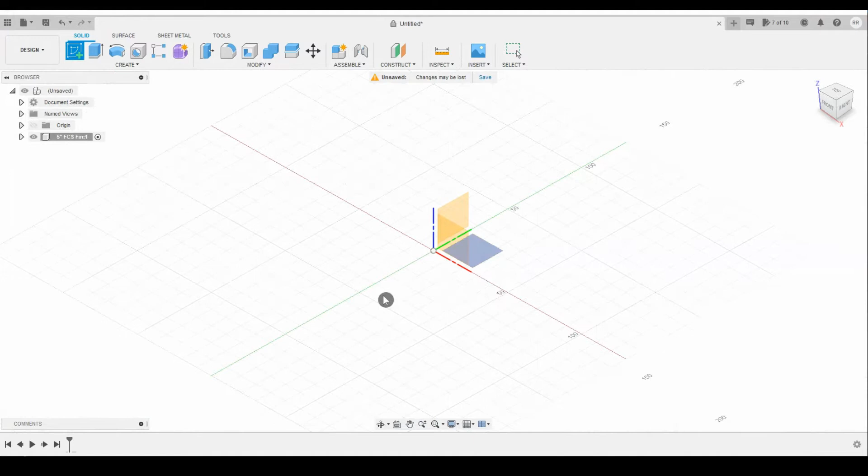Now we need to create a sketch. First thing you need to build everything from sketches in Fusion 360. So create a sketch up here, and we need to tell Fusion 360 where we want to place this sketch. You can see here we've got our top, front and right hand side. I want to create it from the right hand side of the fin. You can put it where you like, whatever makes more sense to you.

So we are now going to draw a sketch on this plane. I want a picture of my fin, so I'm going to insert a canvas and insert from my computer this image, which I found online, which you can probably find yourself with a quick Google search.

Now this canvas is asking where we want to put it. We want to put it on this face that we're looking straight at. It's a bit small at the moment, so we're going to grab this corner piece and drag it out. At the moment this canvas is at the wrong size, it's not the size we want it to be, but handily, it has some measurements on it.

So we're just going to click OK for now, but find our canvas. We're going to expand out our fin in the list over here on the left, and then expand out our canvases, and here is our canvas. We know that because when we hover over it, it turns blue. Right click on that, and we're going to calibrate our canvas.

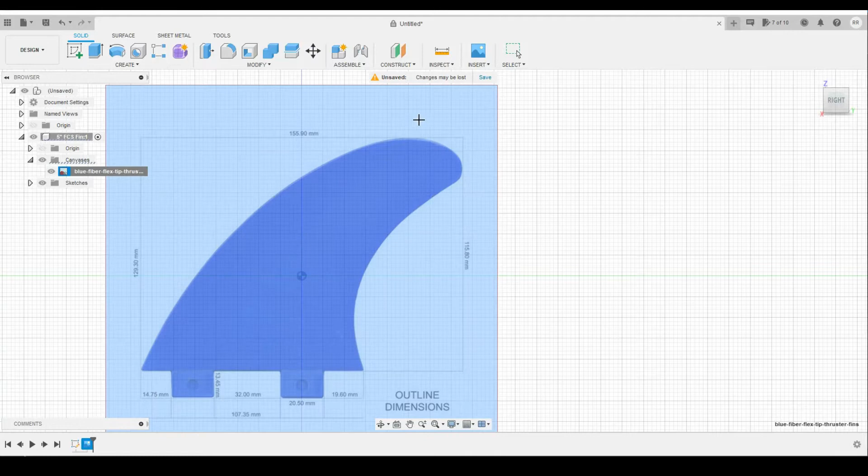We then get these little crosshairs, so we're going to calibrate against a known measurement. We know this measurement here is 115.8 millimeters. So we're going to click at either end of this measurement, click the other end here. Now at the moment it's saying it's 56 millimeters, so that's wrong. So we're just going to overtype it with our 115.8.

We hit enter, that's going to expand our drawing out to now match the right scale. It's in the wrong place though. I want this bottom corner down here to sit on the origin, which is where all the different planes meet in Fusion 360. It's basically our 0 point.

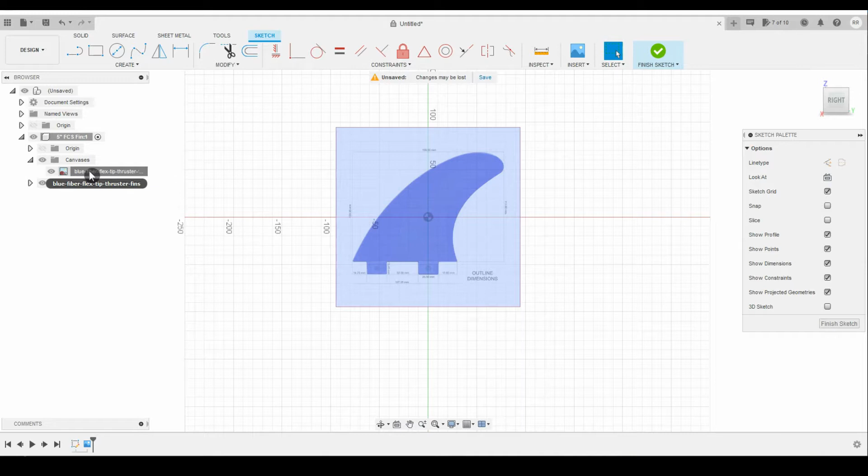So again, we're going to come up into our menu on the left and right click and edit the canvas. That brings us back to the screen that we had before. And now if we pick up this big square, we can just move our canvas anywhere we like.

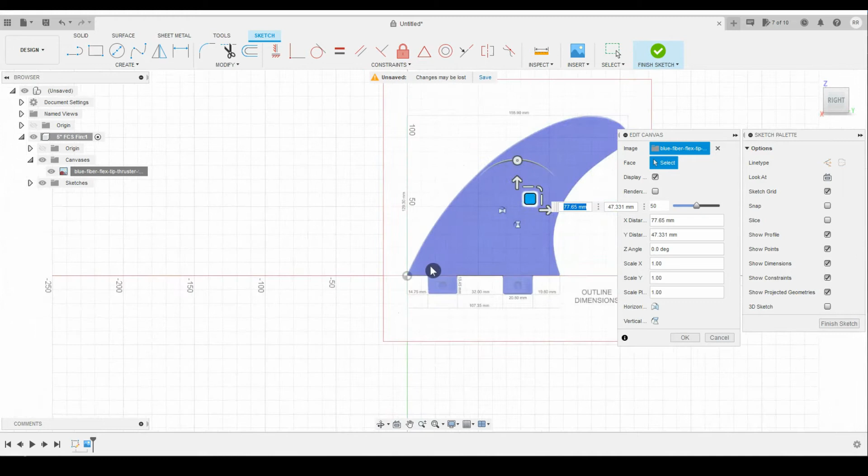Let's zoom in a little bit so we can see what we're doing. So we see on the left hand side we want the line to line up with the green line, and then we want the bottom of the fin to sit on the other axis. Okay, I'm happy with that - this point down here is sitting on the origin. Once we're happy with our positioning of our canvas, we can OK that.

Now what we're going to do is we're going to draw over it. So we're still in create sketch, and the first thing I'm going to do is draw this bottom line of the fin along here. I'm going to go up, I'm going to choose a line from the toolbar at the top.

I'm going to go from our origin, it auto snaps to that origin. Then zoom in a bit, and we're going to put it where that comes down there. Once we're happy with that line, we'll click on the green tick, and that line's in position. Now, because we started that line from the origin, Fusion 360 knows its location and knows we want it to start from that 0 point.

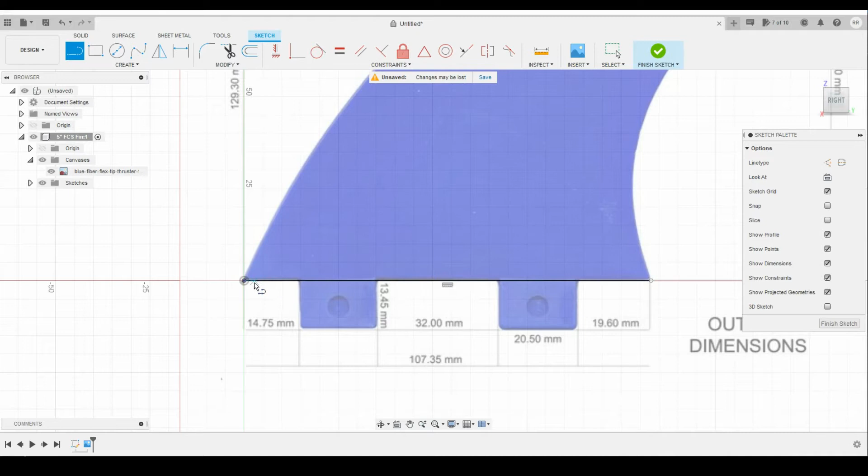If we did a line just randomly anywhere else, it would be blue, because it wouldn't know a dimension from a fixed point unless we told it. It would be blue, and you can run into problems later on with that - it can move all over the place. So it's always best to start a project from an origin if it makes sense to. It's not a hard and fast rule, but it just makes things easier.

The next thing I'm going to do is draw a box around this fin. Now, I'm not going to draw it as a normal line. What I'm going to do is come over to the line type here and choose a construction line. This is mainly for me, so I know that it's not actually part of the drawing - it's a line to help the construction, so it's like a reference line.

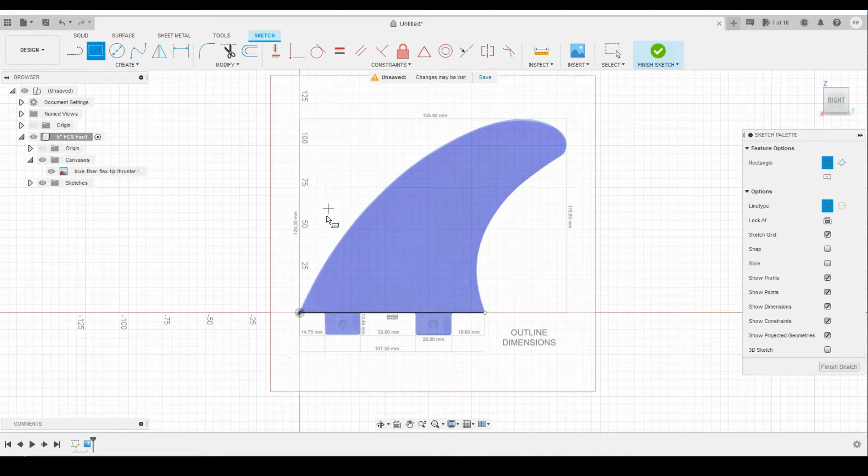I'm just going to zoom in a little bit. I'm going to start from the origin, and put that box around, so it's going to be roughly over here. Now you can see down at the bottom there, highlighted in blue, the measurement across from left to right, and it's currently showing 115.425. We want that to be 155.9 because that's how big that box is.

I'm basically just drawing over the box that's already there. If we then hit Tab, it locks in that dimension at the bottom, and it goes up to the dimension on the right hand side, on the left hand side. And we know from looking at the right hand side that we want that to be 115.8. So now we have a box that sits over the top of our fin to the outer dimensions of our fin.

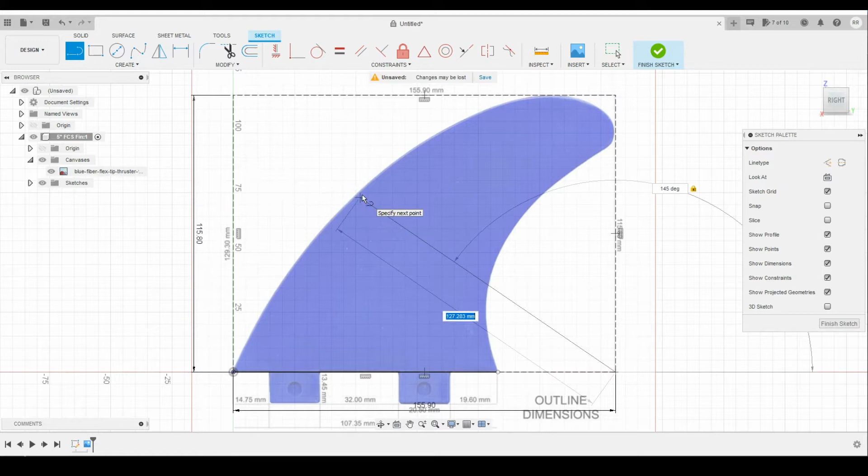And then what I'm going to do is draw a line, not as a construction line. I'm going to draw and put the line over here somewhere at the moment. And I'm not going to set the length - I'm going to tab off of the length and set the angle to 145 degrees. Now, the only way that will move, because I've locked in the angle, I can only change the length. And I'm going to put the length on this line over here. I'll show you why in a minute.

Right, so now we have a couple of things, but what we are missing is an outline of our fin. So I'm going to take the fit point spline tool, and make sure you start right on this corner where it's highlighted and snaps to the corner - don't start anywhere else. Once we click there, we can then start tracing around our shape. Now, you don't have to be too perfect with exactly where this is going, but one thing you do want to do is link up with the end of the line that you just created. For now, we're going to OK that.

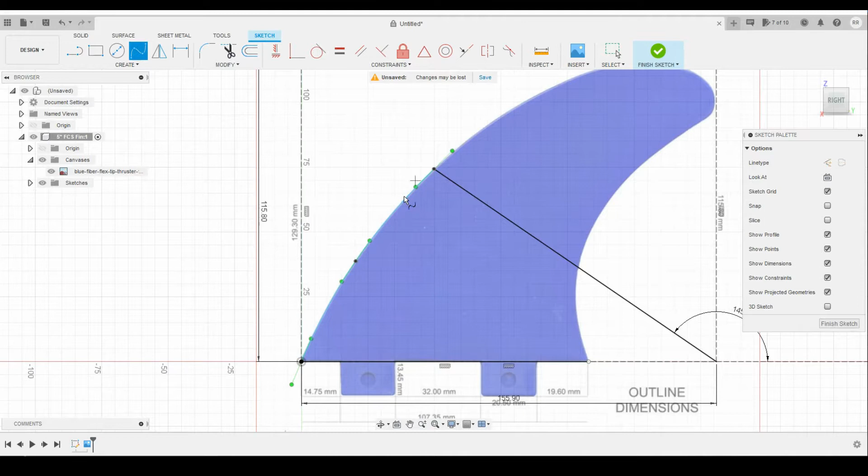So all we have is a line along this curve. Now, if you weren't happy with the position in any of these, you can grab these little T pieces at the end here - I can't remember what they're called - and you can actually tweak that line. I'm quite happy with it there. I might do some more in a minute.

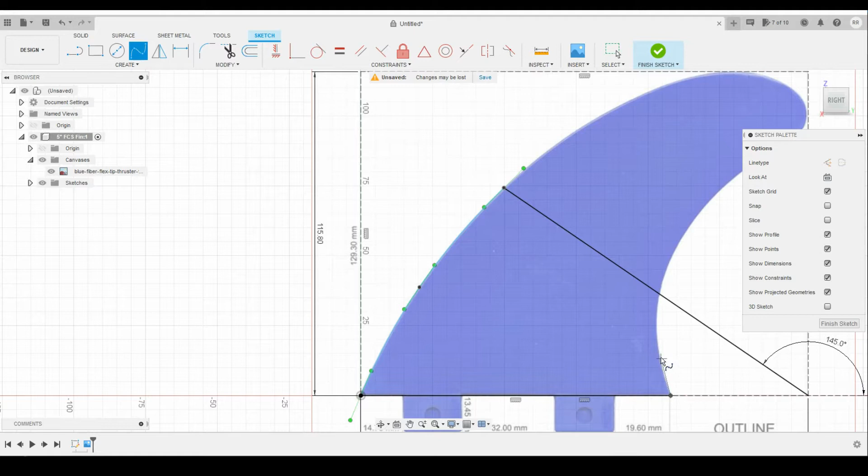Right, another one I'm going to do, I'm going to come down here from the other corner, and put one in. It always helps to have an intermediary point to help your curve. The next one is going to auto snap to the line if we get close enough. Now you see these lines aren't perfect, so hit Escape to come out of the fit point spline tool. Then what you can do on these is pick up these little pieces and drag them around until that line fits where you want it to. Okay, I'm pretty happy with that.

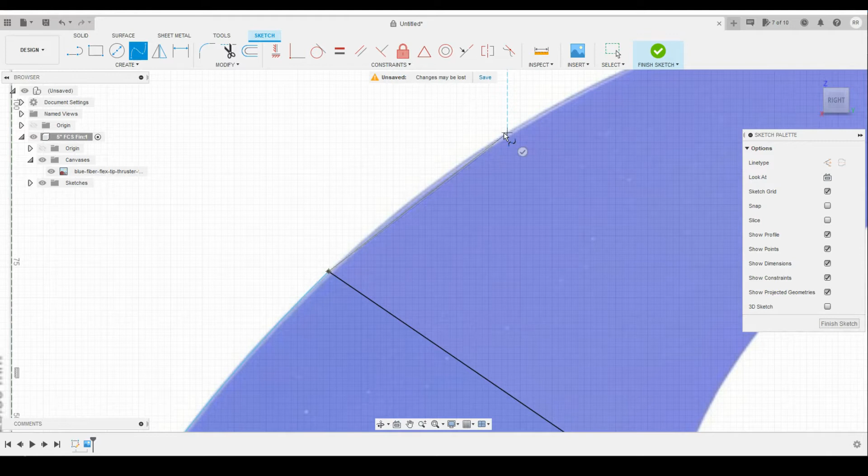Right, now I'm going to come back to the fit point spline - don't know why I struggled to say that. I'm going to go from where we finished the line here, and we're going to start tracing around the rest of our fin. Now when you get to tighter curves, start doing the points a little bit closer to each other. You might have to keep moving your screen around like I am.

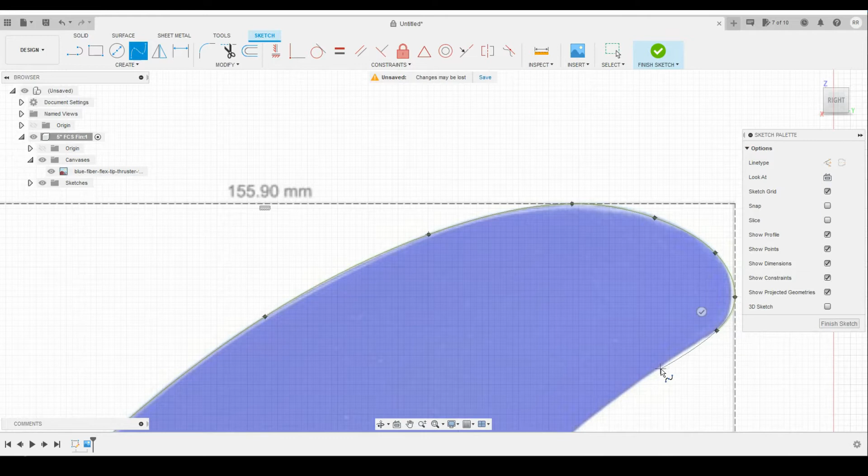Now, no, they're not set in stone. The only ones which are kind of set in stone are the ones where you click on a line, because it puts a coincident at that point and then you have to go and break that to move it. But I'm not going to be too picky because, let's face it, 0.5 millimeter here or there is not going to make a big difference to your fin.

So then we get to the end, we click the little green tick to OK. Now hit Escape, takes you out of the fit point spline tool. Now have a little look at the ends and all the different parts. Pretty happy with the position of all those.

But what you do want to do is the two fit point spline lines that you've put either side, you want to make them tangent to each other, which means basically there'll be a smooth curve between them. So click one, click the other, and it puts this tangent constraint on it. So it makes those two lines flow together.

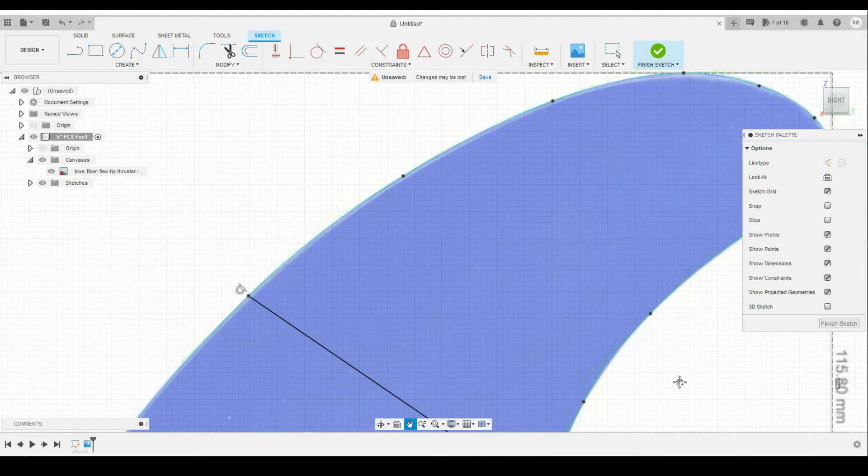You want to do exactly the same over the other side. So again, click one, click the other, and here you go. Hit Escape to come out of your tangent tool. Right, we are now

happy with the outside. We've got two separate areas of our fin. We're going to loft the two parts of the fin separately. If you try and do a loft all the way from one to the other, this part causes a problem.

Imagine a loft like stretching a plastic bag over a shape. If you imagine stretching a plastic bag over this fin, you're going to have a piece of plastic bag that's going to go from here to here. We don't want that. So we're going to get Fusion 360 to treat it as two separate parts.

So the only thing we haven't done is put on our little tags for the FCS mount at the bottom of the fin. Now you may not have these, but I'm going to put them on anyway because a lot of people will be making these for surfboards or for boards that have the FCS mounts in them.

So choose a rectangle tool, just a nice basic rectangle. We're not going to do some construction lines. What we are going to do is let it snap to the bottom line of the fin. The rectangle needs to start on the bottom line of the fin. Let the cursor snap to that bottom line.

Left click and draw out, and don't left click again because we're going to overtype the dimensions to lock in the dimensions of these tabs. So this dimension is 20.5, which is written down over here. And then the other dimension, which we tab to get to, is 13.45.

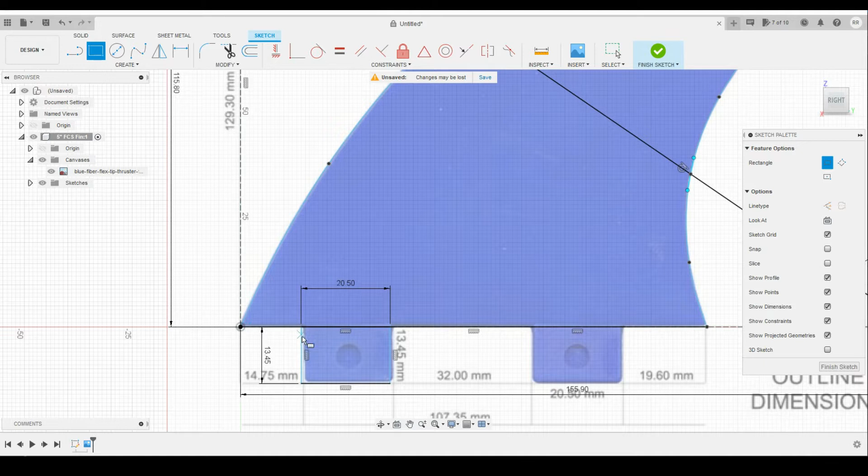Now, left click once we've locked in those dimensions, and you see that this line here is black because it knows that that line is parallel to this line, which is also black because it's locked into the origin. This vertical line here and this vertical line here are blue because it doesn't know where they're supposed to go because we haven't given a dimension from the origin. We'll do that in a minute.

So for now, we'll just do exactly the same over here. We'll do a 20.5 tab to a 13.45, yeah, and then left click. So we should have the same here. The vertical lines are not dimensioned.

So to do that, we're going to hit D on the keyboard and get the dimension shortcut. Choose this line here, and then go to the origin, and then we're going to put our dimension in. You see it's here, 14.75. Hit enter. That locks in both these vertical lines because it knows this vertical line is 20.5 away from this vertical line. So now we have black lines, Fusion's happy.

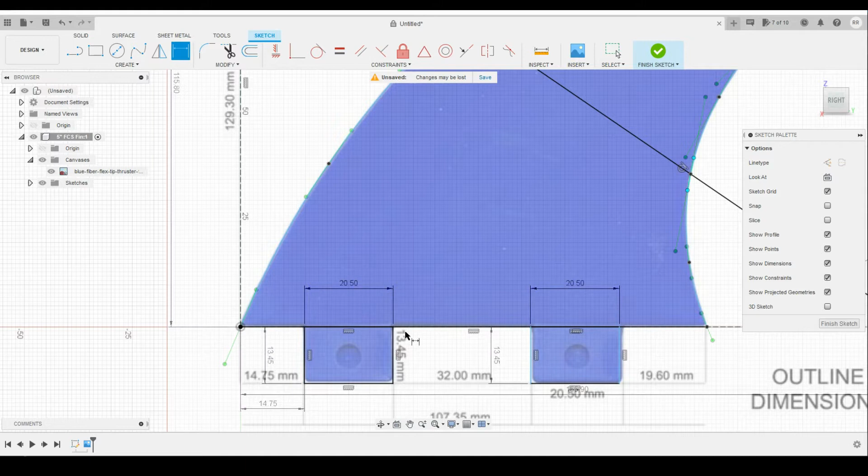Now, still in our dimension tool, we're going to click this line here. We're going to go to the next tab over because that's the dimension we have right here in the middle, which is 32. So left click again, 32 millimeters, hit enter. Right, now we have a dimensioned sketch.

Now, our line that traces around the outside of the fin is blue because it would take quite a lot to dimension all these positions and we don't really care. We're kind of drawing them by freehand. So what we can do now is come back to our canvas, we can turn it off and we've got everything we need. We've traced everything we want from that canvas out onto this sketch.

So we're done with this sketch for now. So we're going to hit finish sketch. Now, what I'm going to do now is I'm actually going to pull the tabs out on the bottom and make them into bodies. So hit E for extrude on your keyboard and you'll get this little extrude tool up on the right hand side.

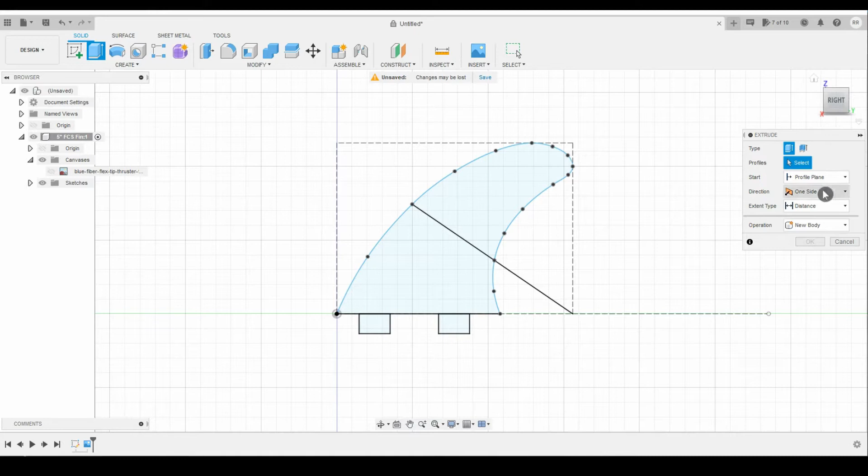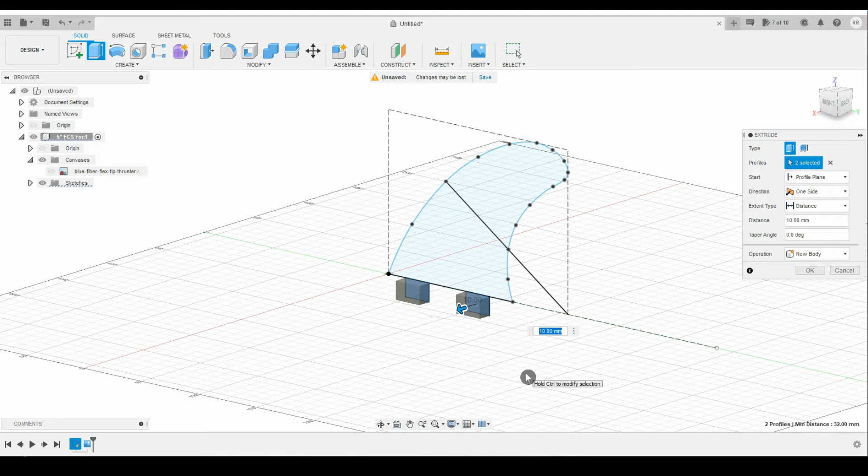Now what it's asking us to do is select the profile or profiles. We want this one and this one. If we just rotate our sketch around, you can see this arrow is asking us how far we want to pull them out. We can make this as big as we like, but I'm making half a fin, so I want it to be half the width of those tabs. Those tabs need to be 6.5, so we're going to make these 3.25 millimeters.

We just hit OK. Now, don't panic, it looks like the sketch is gone. Actually, if we just expand out our sketches, it's just turned it off because it thinks we're done with it, since we've done something with the sketch - we extruded out some bodies. It thinks we're done with it, but we'll just turn that back on. And all it did was hide it.

So we are now going to create another sketch. This sketch is going to be at 90 degrees and it's going to determine the aerofoil of our fin. So create a sketch, choose the plane we're going to put it on.

Now, what you have to be a little bit careful of, if you weren't paying attention, we know where our fin is, but which is top, which is bottom. So just to be sure, if you come over to this cube on the right hand side, you can just click on the corner piece and it shows us like a 45-degree angle down onto both of our sketches now.

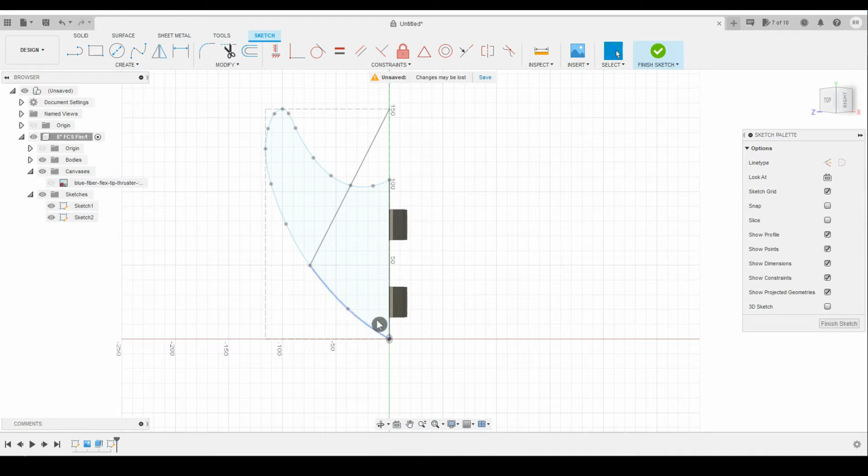So we're still creating a sketch on that same plane, that hasn't changed, but we're looking at it slightly differently. So the front of our fin is at the bottom. So we'll go back to our top view. And if your sketch isn't directly on a plane, which we'll have in a minute, what you actually need to click is 'look at' rather than the top view. So wherever you are, you can just click look at and it'll take you to your sketch.

What I want to do is mark on this sketch where the other sketch, the first sketch we created, intersects it. So I say intersect, I'm going to project. In the create menu on the top left, come down to project include, click project. Now what this is going to do is put a mark on the sketch we're working on for any point that we choose.

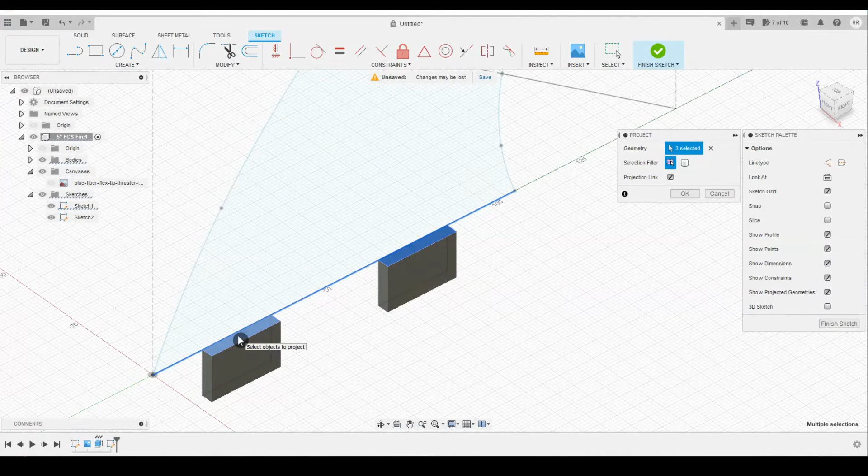So I'm actually going to pivot around a little bit so we can see all these things. I want this bottom line from the fin because we're going to draw from there - that's our center line of our fin. And I'm going to click this top face and this top face because I want to see those. And then I'm going to click OK. Right, I'm going to go back to look at.

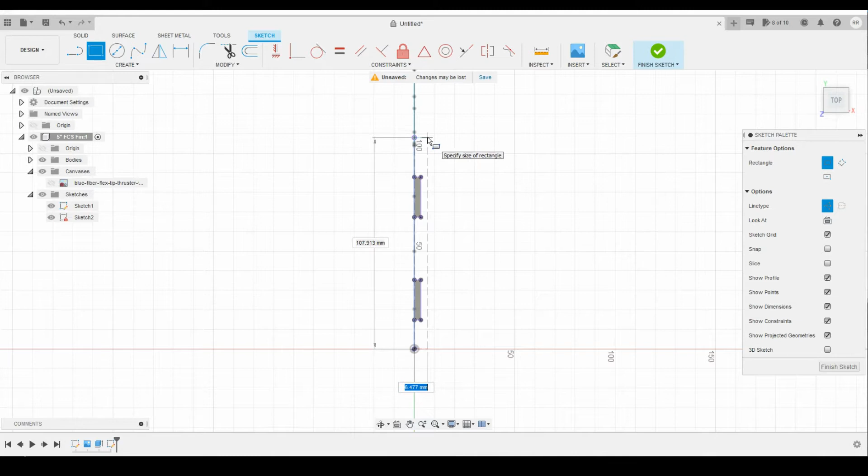Now we're looking back at our sketch. We can select a 2-point rectangle, choose a construction line. What we're going to do is put a box around it, which goes from that front intersect point and the rear intersect point. And then we choose the width of half of our fin. Now I'm going to make my fin 10 millimeters wide, so I'm going to choose this box to be 5 millimeters wide. Hit enter. And now we've got a box in construction line that goes round where we want our fin shape to be.

So again, look at back to our sketch. So now I'm going to take a fit point spline again, and I'm going to draw. If you've forgotten to click the line type off of construction, you can just come over here and do it anytime, and the line you're about to draw will switch back. So I'm going to draw.

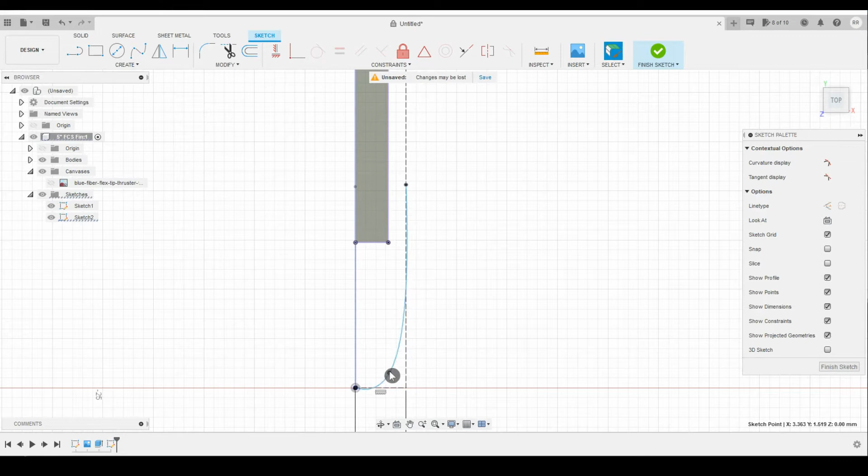I want something to kind of end up over here somewhere with a nice smooth curve. So let's give it a point here and then a point here. I'll select OK. If you hit escape at this point, you can then pick up these points. You can move them around wherever you like, so play about with them, get the shape you want for the front of your aerofoil.

Now what I want is I want the two sides to flow into each other at this bottom section. So what I'm going to do is select this little handle, and select the horizontal vertical constraint. What that does is make sure that the end of this line ends completely horizontally, which will flow directly into the other side when we mirror this.

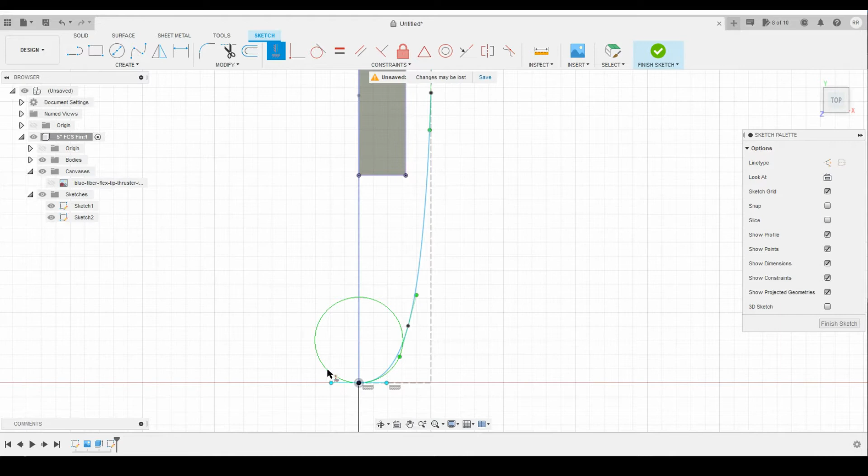Okay, so hit escape to come out of that, and just have a little look at the profile of the front. Yeah, I'm pretty happy with that.

So then I'm going to do the back. Again, fit point spline. So we have our intersect point here.

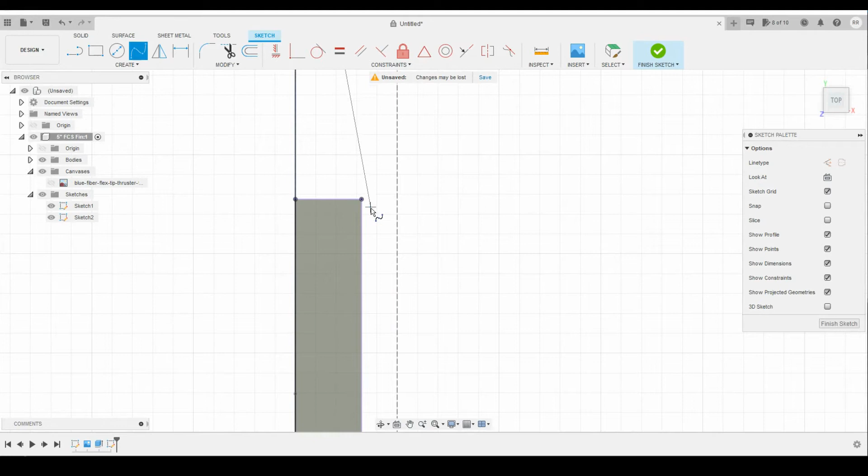And then I want to just miss this back corner. If we have a look at the general profile, you think, yeah, I want it to be kind of about here, but with a slight curve to it, so it just misses this point. I'd say don't put it on this point because it will stay tied to it. So come just outside of it and then pick a point down here where you want your shape to continue.

Again, click the green tick. And now you need to have a look at this and just see if you like the shape. So we've got a bit of a curve there, a bit of a curve here.

I'm still in the fit point spline. I'm just going to try and get out of that. I don't know why it's still in that.

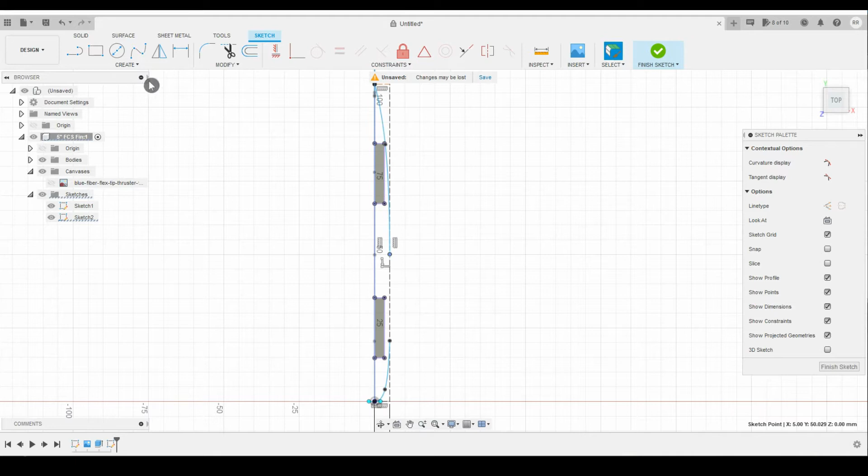So you can bring that a little bit further down here, so then we've got this back part here flowing nicely into this part here. But what I am going to do is connect both of these with a solid line.

And then I want these to be a nice smooth flow together, all these lines connected. So what you need to do is hit the tangent constraint and give a tangent constraint between your rear curve and the straight section in the middle, and then between your front curve and the straight section in the middle.

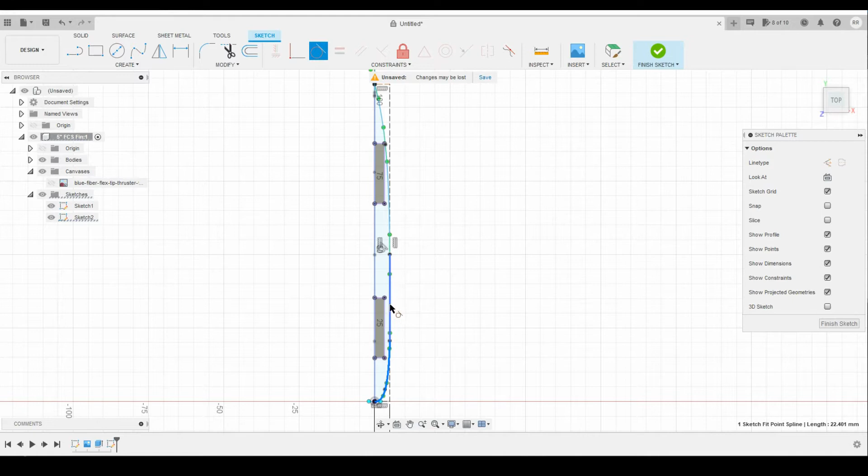And so here it puts on a tangent constraint. So those lines all flow nicely together now.

Now, as you see, I hit escape to come out of that. We've got a profile here. Because it highlights blue when you go over it, it means that it's a closed in profile, which means it's all good to be used for a loft.

If it wasn't blue, it would mean that there's a break in the perimeter line of the profile somewhere. So if yours doesn't highlight blue, you need to go and find that and make sure that you've clicked on the proper intersect points at each end, and that these lines are intersecting the box that you've put round, and that everything's connected by a solid line.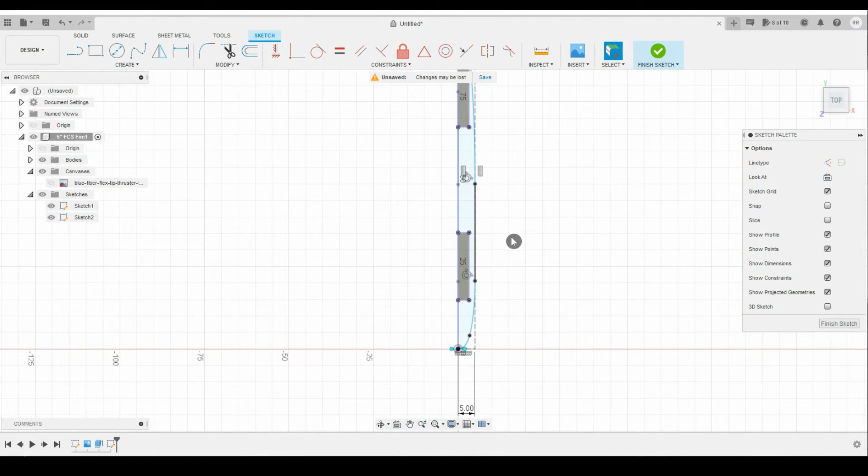Okay, we can now finish that sketch. If we click home, we can see where we're at. So we have a profile for the bottom shape of the fin, and then we're ready to do our next one.

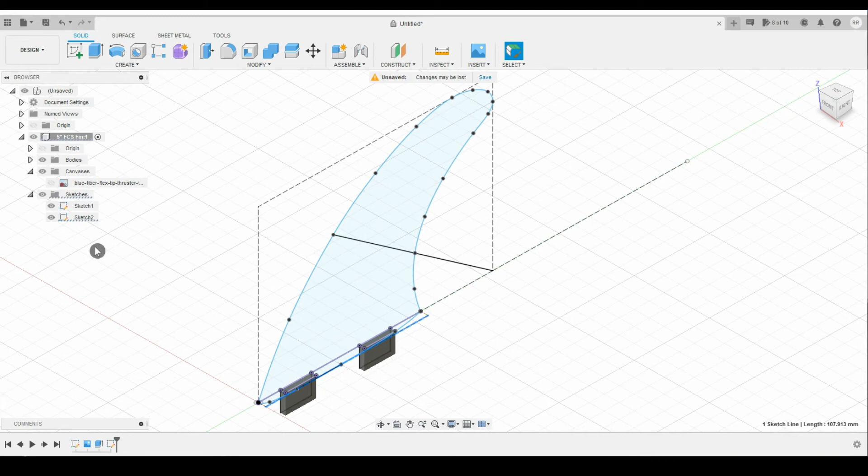I did forget to do one thing, so we need to go back in, right click on any of the lines in that sketch, or click over here on our sketch 2 and then right click and edit sketch. Now what I want to do, all will become clear later on.

I want to put a line from this rear point going out from the sketch. So there's no, see it's not clicking there. It means there isn't an intersect point on this sketch, so we need to put one in.

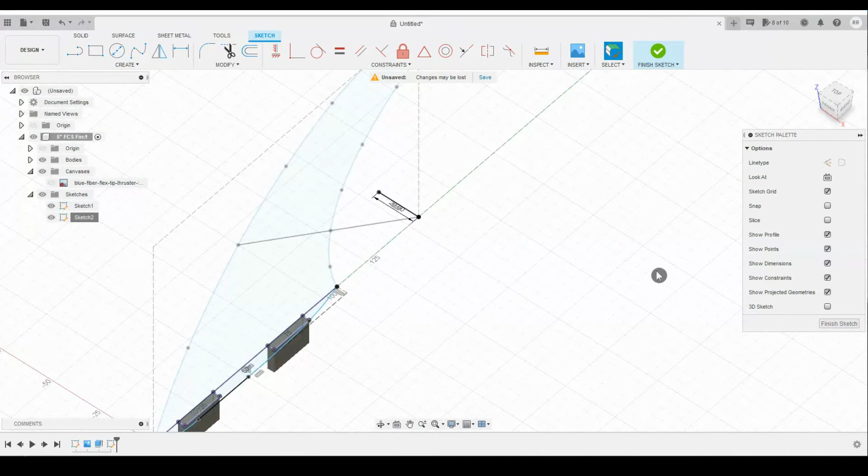So we need to create an intersect point, and you see where it highlights now red. Click to create an intersect point between those sketches. We can then use our line tool and put a line up, and I'm going to make it 20 millimeters long. Hit enter, and now our sketch is actually finished.

So now we have our first 2 sketches of 3 done. The next thing we're going to do is we need to put a plane that lines up with this line that we put through the middle of the fin here. And the way we're going to do that is we're going to construct a plane at an angle.

So select plane at angle from the construct menu, and now it's asking over here for a line. And that's why we did this little line over here - it gives us an axis for our plane to pivot around.

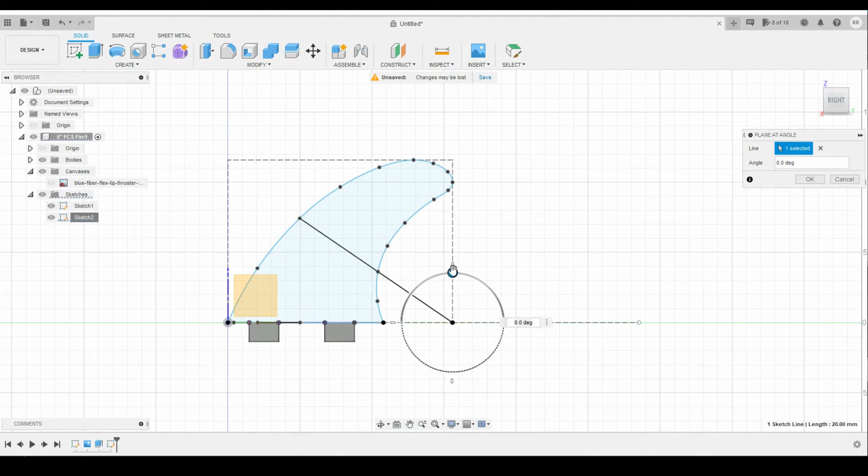So I'm going to move looking at the right hand side, and when I change this angle here, if I zoom in you can see that a bit better. What we're doing is we're lining up that axis with this line here, which we already put in, and that's 35 degrees in this instance.

This orange square shows that we've put in a plane. So originally you have 3 different planes, and we're putting in a 4th one at an angle that we've chosen.

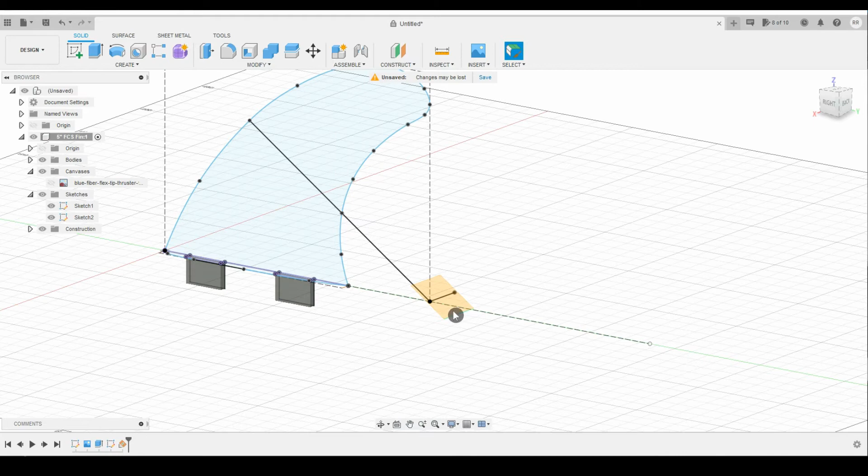So we're going to create a sketch, and instead of choosing one of these 3 planes, we're going to choose our new plane. And that turns the view, let's see if I can show you.

If we rotate from that view, you can hopefully see that all these lines are now on the plane of this blue highlighted line. If we go back and look from the top, we're not actually lined up with that plane. That's why you want to click 'look at' in the sketch palette.

We're going to do the same thing we did before: we want to see the intersect points where the plane with the fin profile intersects with that plane and this line. So we're going to create an intersect.

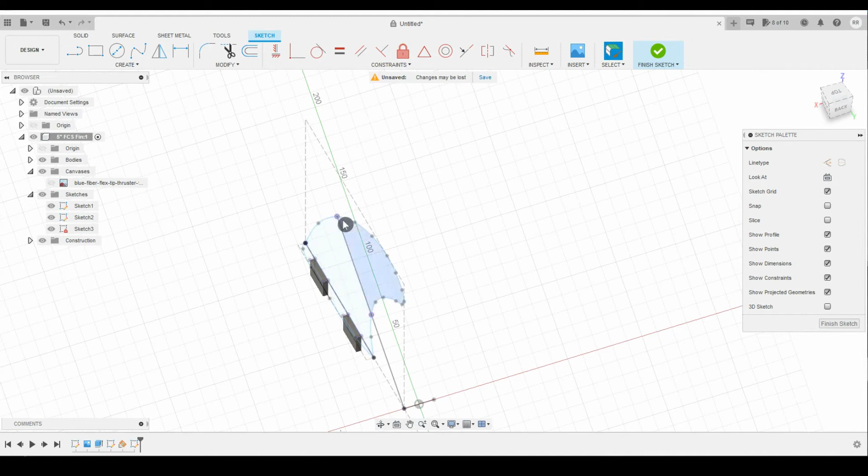We're going to click on this outside one. You see it's got these 2 red dots that line up with that line here and here. Once we've clicked that, it puts 2 purple dots, the intersect projections on our plane. We're going to look at that again, which puts us directly down on top of this sketch.

I'm going to do the same thing. Let me just turn off the bottom one to make it a little easier, and I'm going to hide the bodies at the bottom to make things simpler.

This is halfway along our fin. At the tip of our fin, we actually want the thickness to drop to 0, or I do anyway. You can do what you like, but what I'm not going to do is put this construction line box like I did on the other plane.

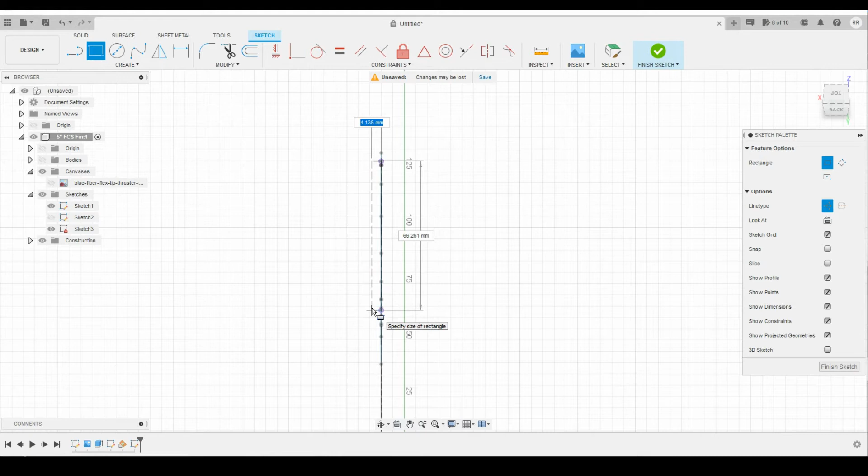I'm not going to make it 5mm, I'm actually going to make it 3mm. I haven't gone half of the 5mm because I don't want it to be a linear line. I actually want it to curve a bit through the middle of the fin.

So make that 3mm the length. I just got it to tie in with the other projection. Now that box lines up with the front and rear of our fin directly on the lines where it cuts through. That's why we did the intersect.

Right, so now we've just got to draw a profile. We're going to look at it again. Annoyingly, it looks at the bottom of it, not the top, so we have to keep moving it. Let's get that in a good position.

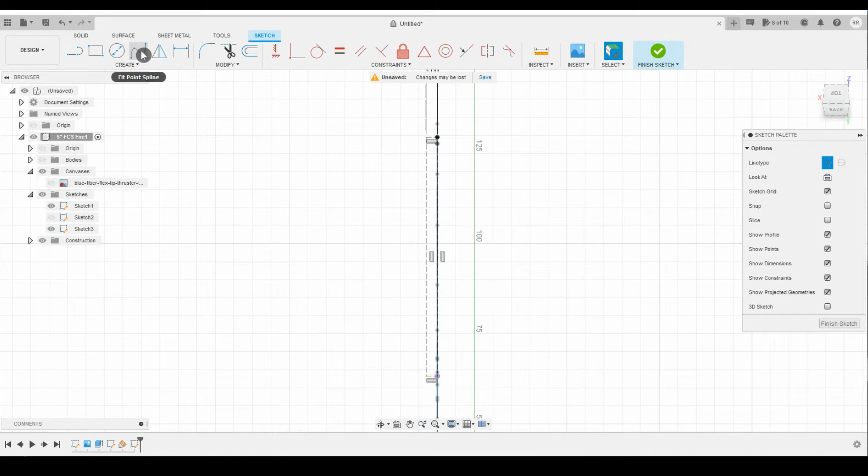Right, so fit point spline tool, and we're going to draw a little profile on here. Again, it's a construction line at the moment, so I'll turn that off. Now I want this to come back a little bit more by the time we get to halfway down the fin.

So let's try that again, green box. Now again, I don't want to double this because we'll end up with like a weird M shape at the front of our fin. So I want to choose the horizontal vertical constraint so that the two sides of the fin fit together nicely. Hit escape to get off of that.

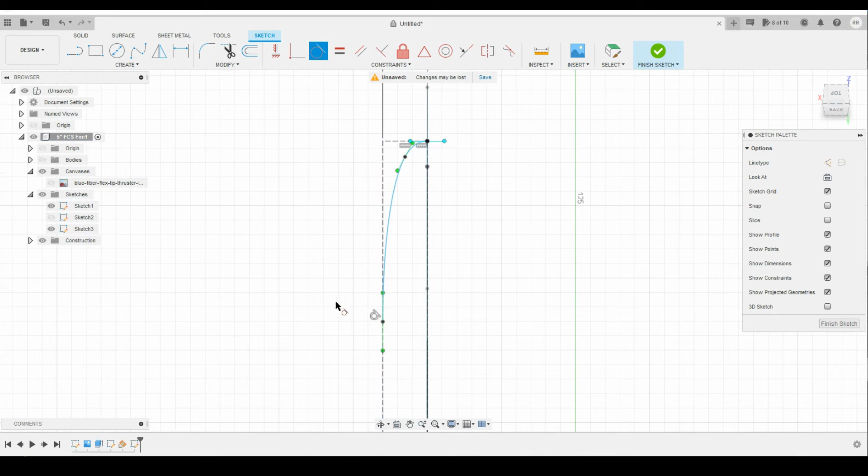And then I'm going to make this line tangent to the edge of this box, and then hit escape to come out of that.

Then I'm going to use fit point spline again and choose the very rear point. You need to let it snap to that point to know it lines up perfectly. It's really important that it lines up perfectly for when we do our loft, otherwise it will just say the rail doesn't intersect the profile. So we're going to make sure that does that right.

Now what I'm going to do is put this up here somewhere, let's say here. I'm only doing one position there. Oh no, that's not done what I wanted it to do. Let's try that again. Left click here, left click here. Right, I missed and put another fit point spline in.

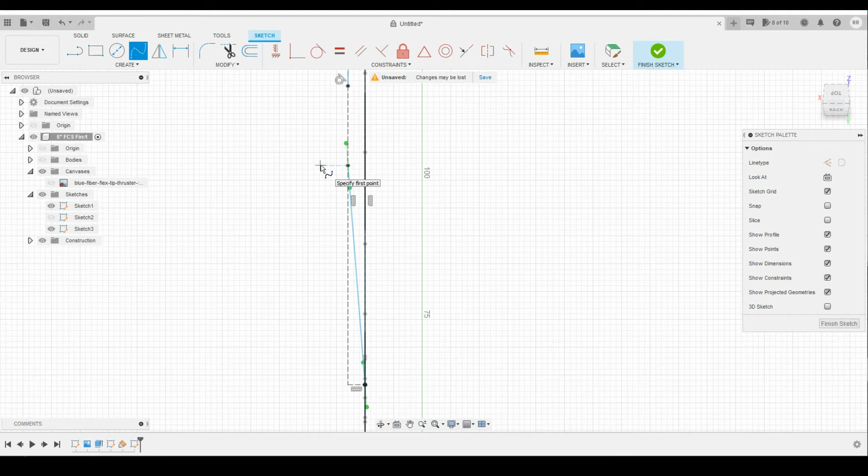When I make this line tangent with this line, see the way it curves - you get a nice smooth curve all the way from the back edge to this point I put in here. And then I can just draw a line between here and here.

Now remember what I was saying earlier, this looks like a profile, but when I hover over it, even when I escape out of this tool, it's not changing color. That's because on this particular line, on this particular sketch, if I turn off all the other sketches, there isn't a solid line from here to here. So it's not a closed sketch.

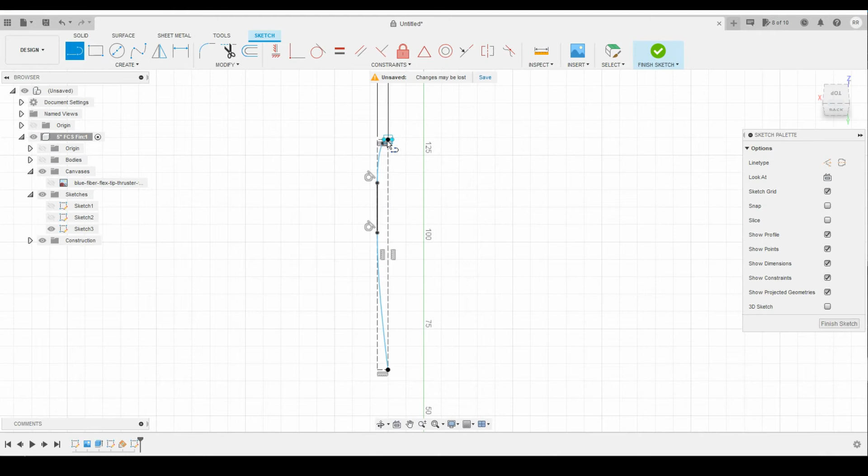So what we'll do, sorry, it's not a closed profile, not a closed sketch. We're going to select a line, make sure it's not construction, and simply draw a line from here to here. Now let's change color. So when I escape and come over it, we get the whole profile turning blue. Don't come off your sketch until you've got that. If you're not getting that, check all the perimeters and make sure it's all closed in and it's a continuous loop. Okay, so that sketch is finished.

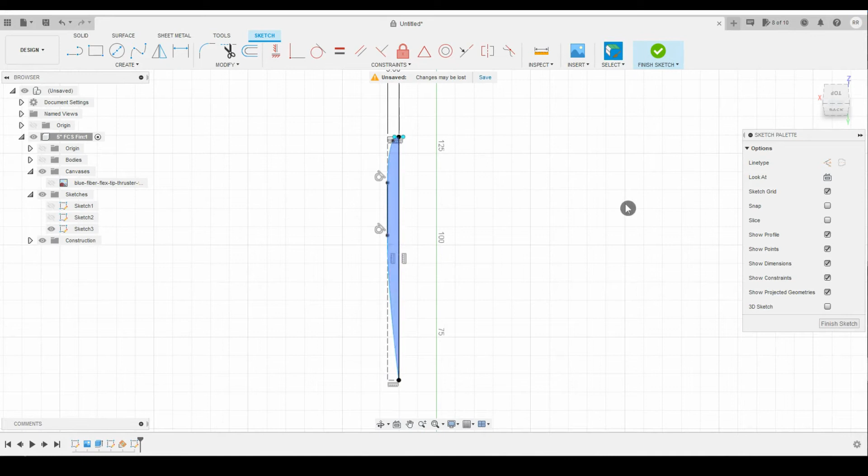We've finished the sketch. Now when we click home, I'm not seeing everything because I turned all my sketches off. Turn all my sketches back on. So now we have 3 sketches. We have our main outline profile of our fin in 2 pieces. We have the bottom profile and we have the middle profile.

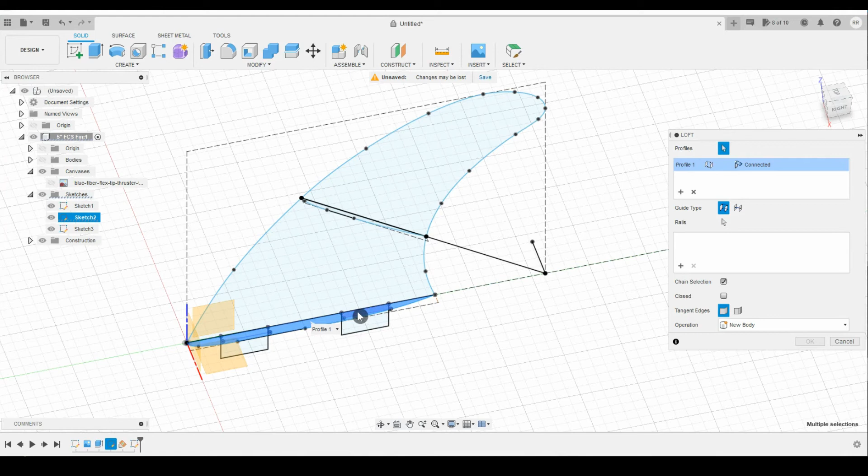Now this is where the fun starts with the loft. We're going to create a loft. Now, what do we need to do in a loft? We need to set profiles. Our profiles are going to be the base, but also select the tab edges. Make sure you've got everything in this whole profile, the bottom of the fin. And then our next profile is going to be the middle profile.

The object we're creating is not visible. It's because I turned bodies off. I need to turn bodies back on. So look what it's done here.

So naturally, the loft has connected the two profiles in a straight line. So imagine stretching a plastic bag, like I said before, it's just going to do it in straight lines, unless you give it structure by telling it rails to follow.

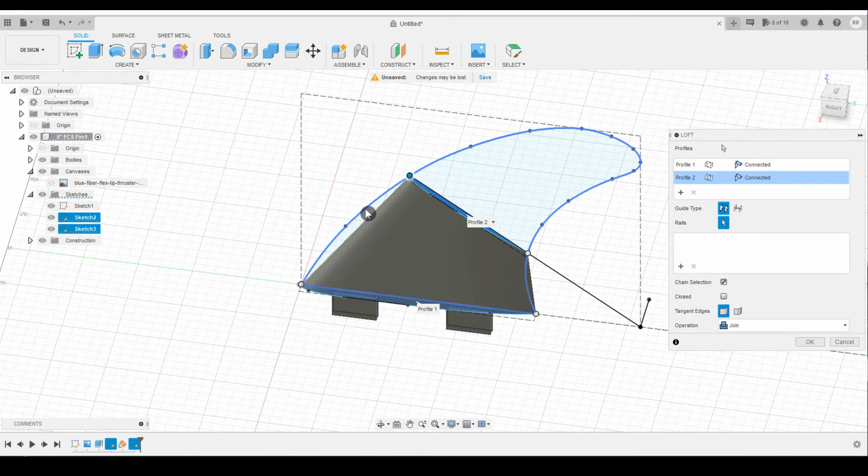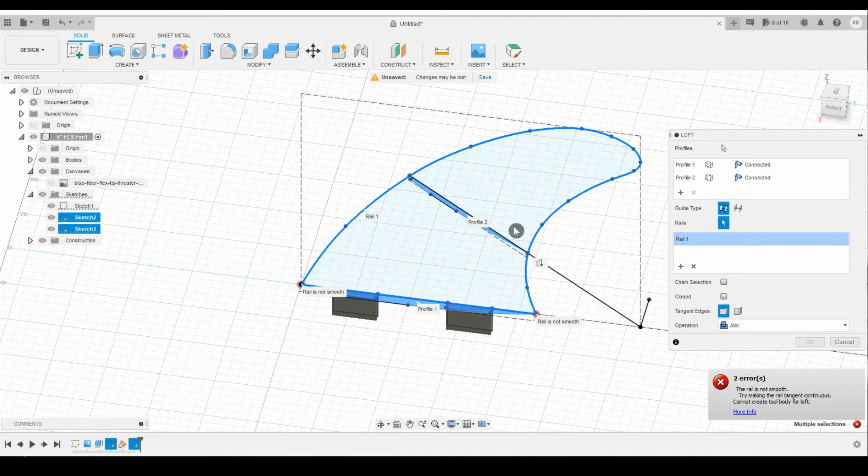So down here we see rails. If you click on this little pointer, it then lets you select rails. Oh, rail is not smooth. Yes, it's because we've got chain selection. What it's done is selected this entire outline. Now this is the problem you'll have if you create this outline profile in your original sketch all in one. If you get this rail is not smooth problem, it's because you've selected... oh God, it's done it again. Okay. Close that rail, unclick chain selection. Then you can click the individual parts of those rails for that profile.

Now we have what we want. We have a loft, nice and smooth, following all the lines we'd like it to, the rails that we've told it to follow.

Okay, so we will OK. We let it join, so it's joined to these bottom tabs. So we now have one body. These are all connected together.

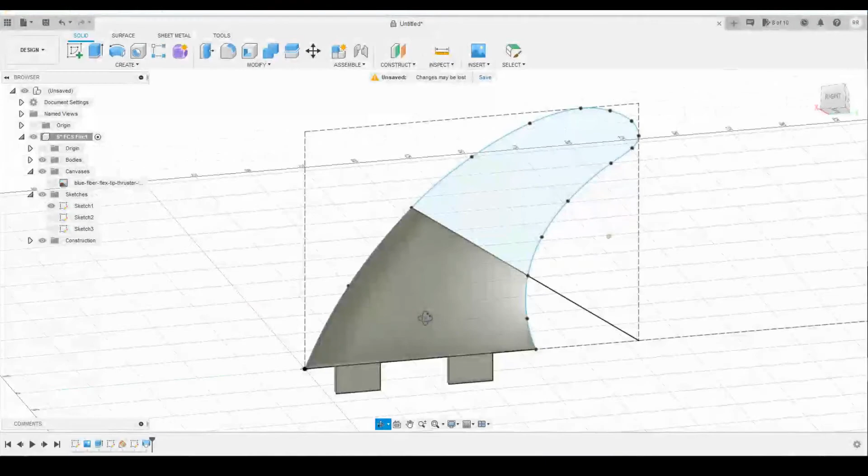Now we're going to go straight into doing a second loft. But look, because we've finished with that sketch, it's turned it off. So let's turn sketch 3, which is the middle profile, back on, just to make it easier to see.

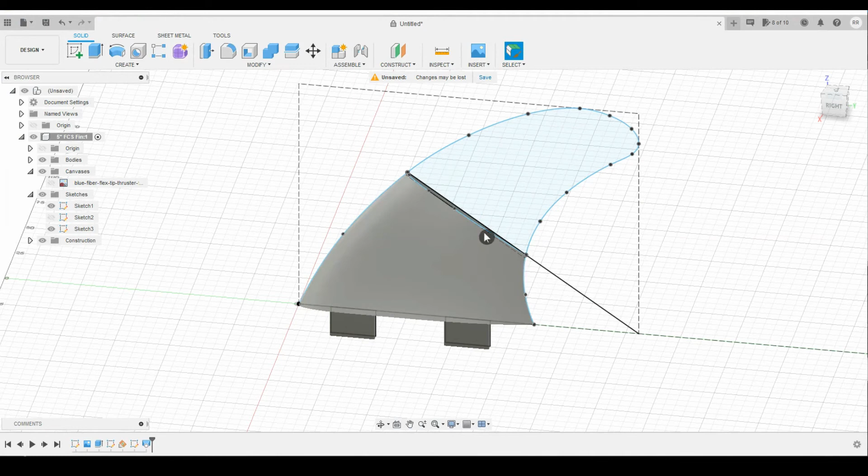So we're going to straight away create another loft. Now the profile we're going to come from is the top of the shape, the body we just created. And then the next one, you think, well, there isn't one over here. It's actually going to create - you can create a loft to a profile that's at 90 degrees. So if we click here, it looks like we're done because it's created this profile.

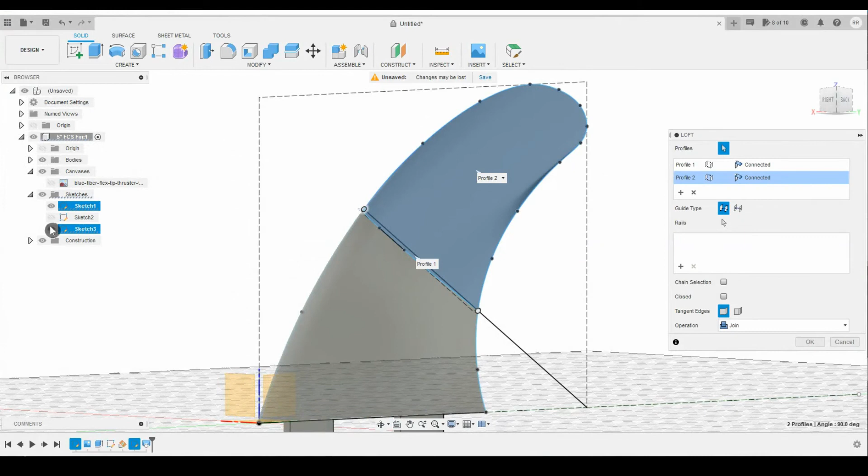But the join between the two, unless we are masters of creating the perfect profile in the middle, which to be fair, it's not bad, it's just got a little bit of a dip in the middle. It's difficult to see unless I turn the sketches off. So we're just looking at that profile. It's just not that smooth right in the middle.

So what we're going to do is turn the sketches back on to make it a little bit easier to see. Right, I accidentally clicked off the loft. So we're going to do that loft again. So we're just simply... mouse issues. Right, we're going to click that one. We're going to click that one. Let it do its loft.

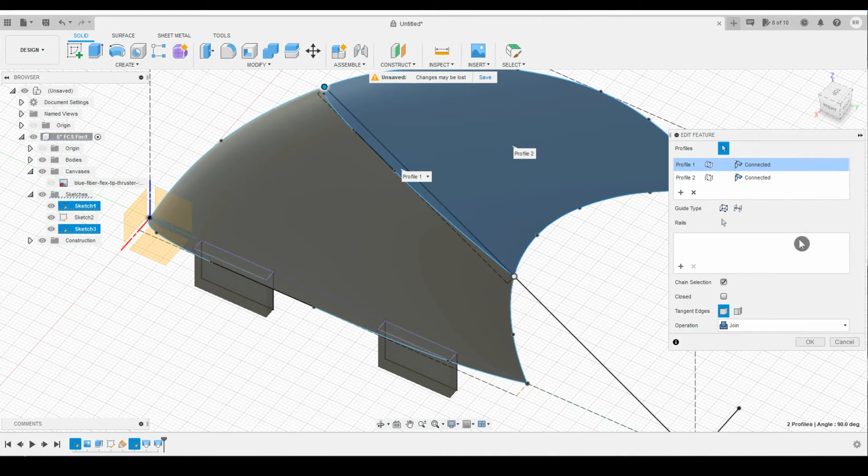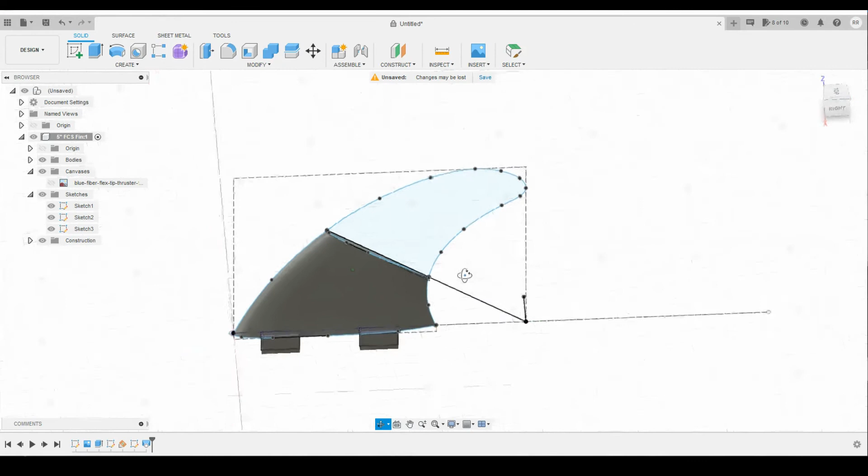Now, what we want is we want these two to flow together a little bit nicer. So up here, right, we're going to create - so now we're going to create our second loft.

We need to click the small profile in the middle here, and then we're going to create a loft to the profile at 90 degrees to it, which is the side profile. We want it to join, we want it to all be one body. I'm going to click OK.

Now, if we turn all our sketches off, we've got a pretty good fin there. So we've got a line in the middle. Now, there's a couple of ways to get rid of that line.

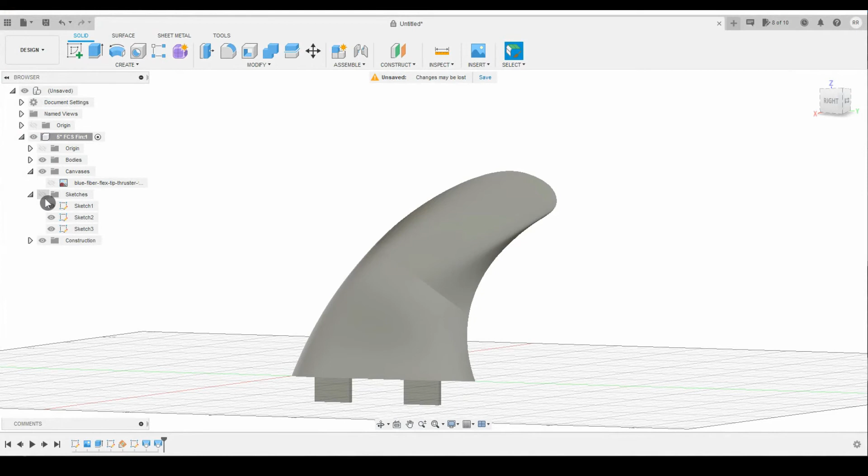If you want to get everything perfect, what you'll need to do from the beginning is create more than one of these lines. So what I did on another one is I actually put 3 in - one across here and one across here. That way you can make a much smoother loft, you create 4 different lofts and it creates a much smoother arc between the end of the fin here and the start of the fin down here.

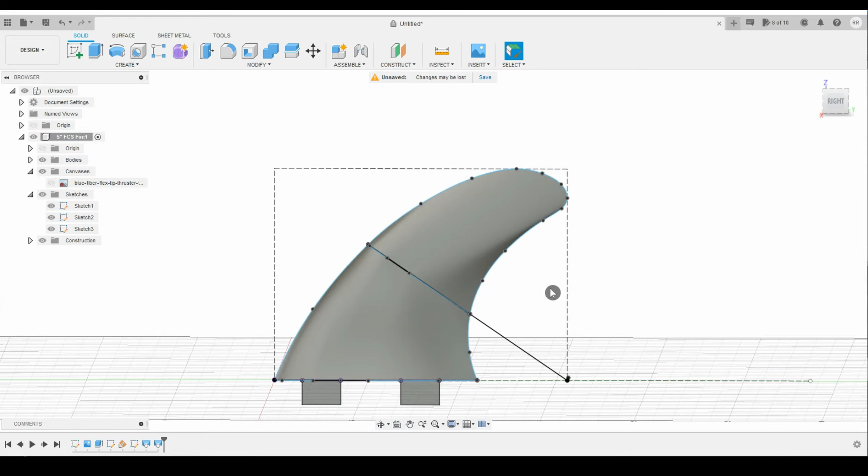But because we're only working with one at the moment, what we can do is go in and play with it until we get it kind of how we want it. So what we need to do is work out what's going on with it, what we think we need to do. I would say it's just a little bit too tight. So what we'll do is bring it out a little bit.

So we can turn our sketches back on. Sketch 3, we're going to go back in and edit the sketch. This is the good thing about Fusion 360 - if you right click on this sketch, you can edit it and it will take the timeline back to when you last edited this sketch. So we'll turn off the base sketch, we're just working with this one. In fact, I'm going to turn off the bodies as well to make it a bit clearer.

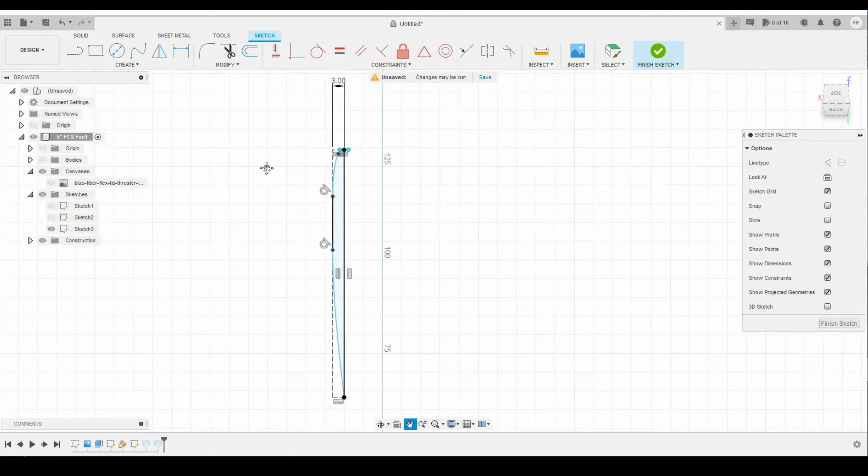Right, so I'm going to change this 3mm to 3.5. When I do that, it's going to automatically pull everything else out. And all you need to do is click Finish Sketch, turn on our body again, and we can just see the difference. Okay, we've still got a line.

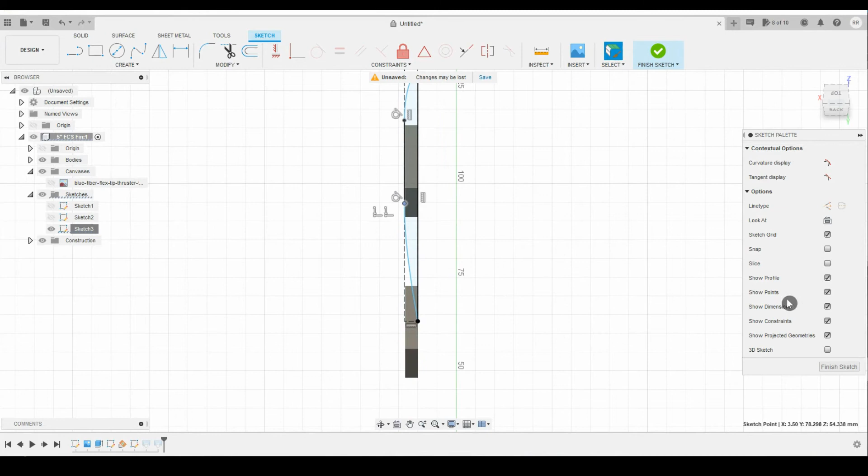And I would say it just needs to come out a bit more at the back than it does at the front. Now you can carry on playing with this to your heart's content, just keep going back in and doing it over and over again. What I'll do this time is just grab this point, bring it back here somewhere, finish sketch, and have another look. Now, you see there's still a bit of a line there, but that's the simplest way of creating a fin.

Now, let me show you one where I have more sketches in it.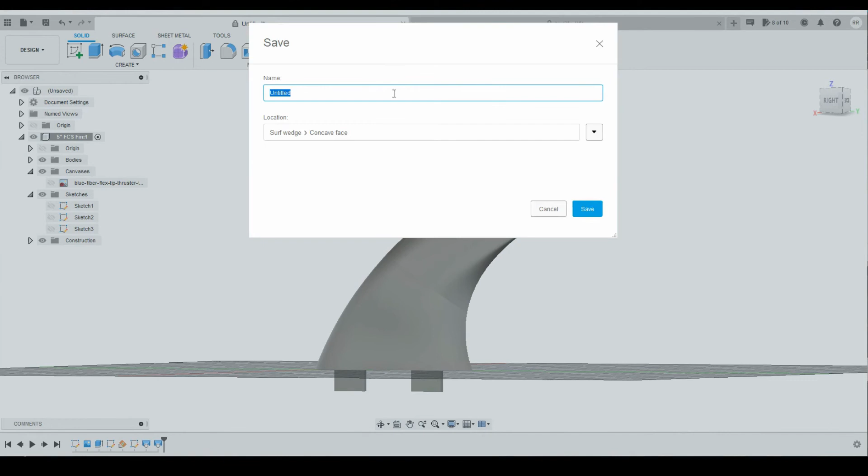Actually, before we go any further, we should have done this right at the beginning. Save it. Save it somewhere that makes sense, create a new folder if you need to. I've got plenty of these. So we'll do a 5-inch FCS fin. Okay.

Okay, so here is one where I put in far more profiles and you get a much smoother transition across the whole fin. Everything else was done the same, I just put more in. The more you put in, the smoother you get that whole blend between all those different profiles.

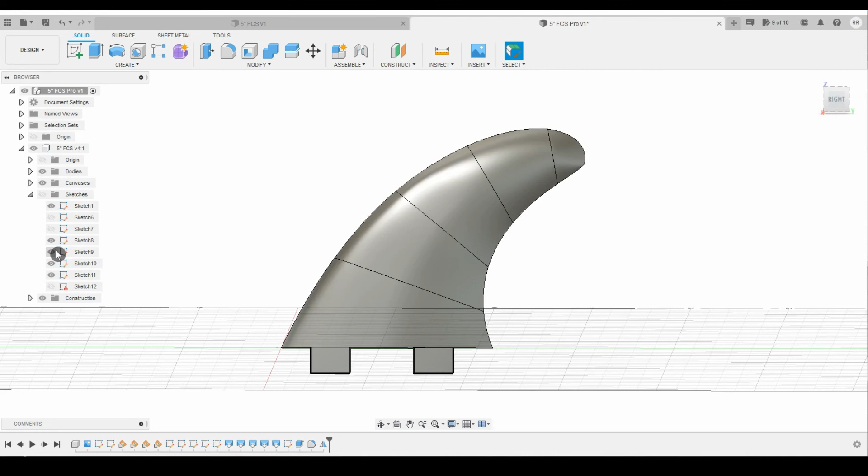If I turn on my sketches in this one, you can see they will be later sketches I imagine. Oops, if you turn on the main thing - so you can see there, literally just did more. I did 4 instead of just 1. And that enabled me to just gently blend them all together. It's not a huge amount more work, but it does take a little bit more time. Everything else was exactly the same in this one.

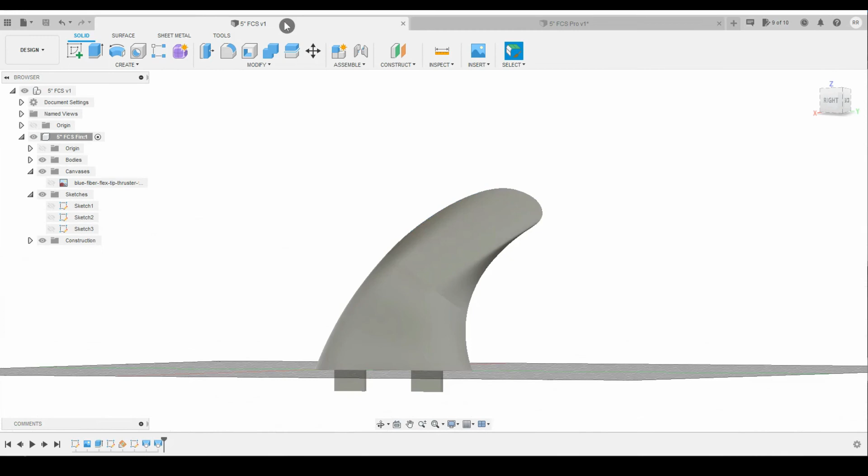Okay, so going back to our one middle profile fin, the only thing we need to do now is turn on our sketches.

Okay, what I'm going to do is put a little chamfer on the bottom edges of these mounts so they fit in the holes nicely. So we'll click the fillet tool and then select all the edges. Now I only want to do the outside edges because the inside edge is going to be glued together to the other side of the fin, because we are only making half of a fin. Once we've done this, we'll then mirror the two parts.

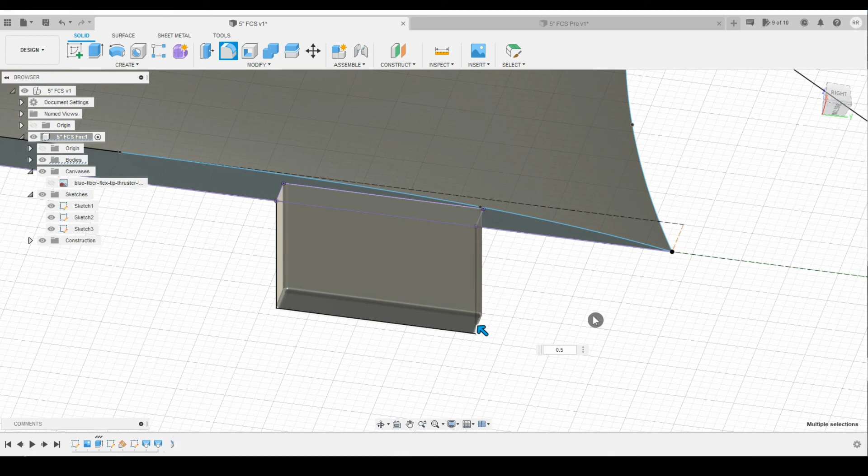And let's give it a 0.5mm radius. Perfect, so we can see we've got a nice radius in all these corners there. So let's click home, take us back to home position. So we've got half of a fin, but the other half is flat.

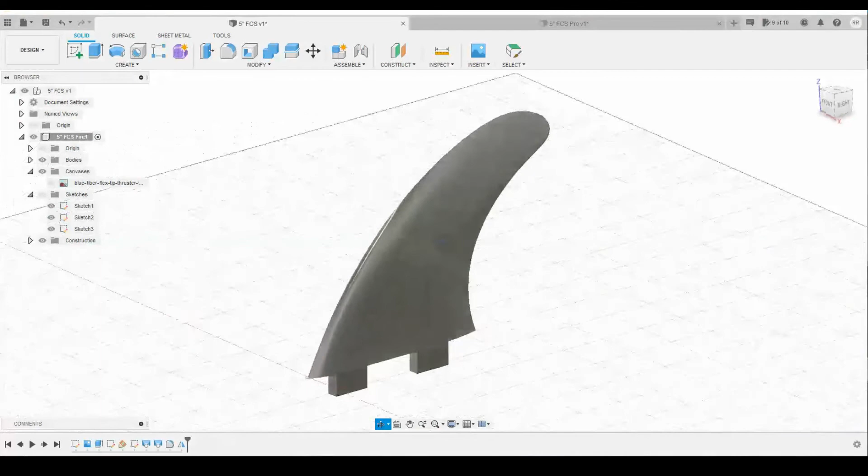So all we're going to do, go to the Create and Mirror tool, and make sure up here where you've got type, it's bodies, not faces or anything else. There's lots of different things you can mirror, components, bodies, faces, but we want bodies. We want to mirror this body. Select that body, and then the mirror plane, you can either select the plane down here, or you can select the face, the flat face, which is what I'm going to do here. And we want it to join because we want to put those two bodies into one, and then we are left with a fin.

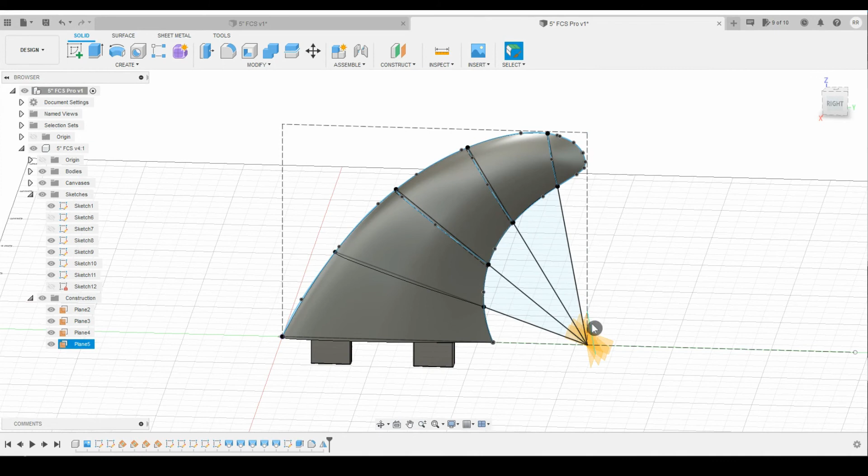Now, all the imperfections in this fin, you might look at this and think it's going a little too thin too soon, and that's all because we've only got one intersecting plane in the middle. So put more in, just follow exactly the same method, put different planes. I'll go back here and turn on all my construction planes. You can see I put multiple planes, all on that same axis, and all those planes line up. If I go on the right, all those planes line up with all these lines. It's just repetition. The more you put in, the smoother the transition between them all.

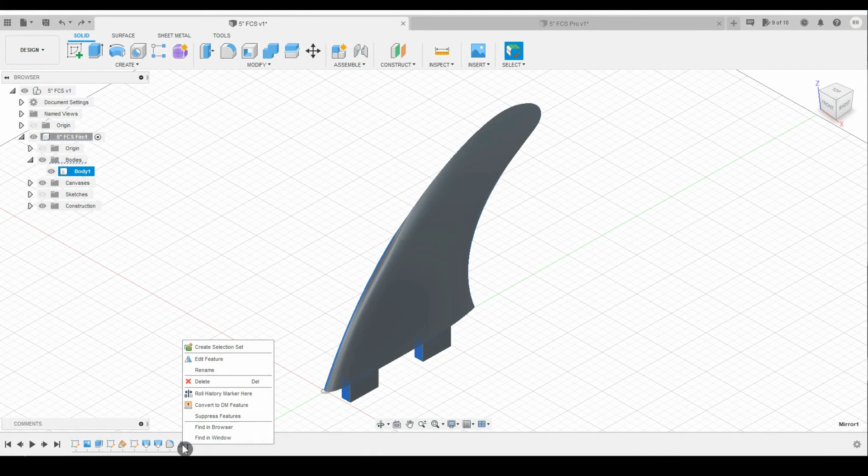And that is how we turn a drawing of a fin into a fin. What I am going to do at this stage, I'm actually going to back up a little bit, and I'm going to undo the mirror. Now there's a couple of ways of doing this. You can just click undo at the top left, undo mirror, or right click down in your timeline, mirror feature, edit feature. What I want to do for being able to print these in two halves, I'm going to change the join to new body.

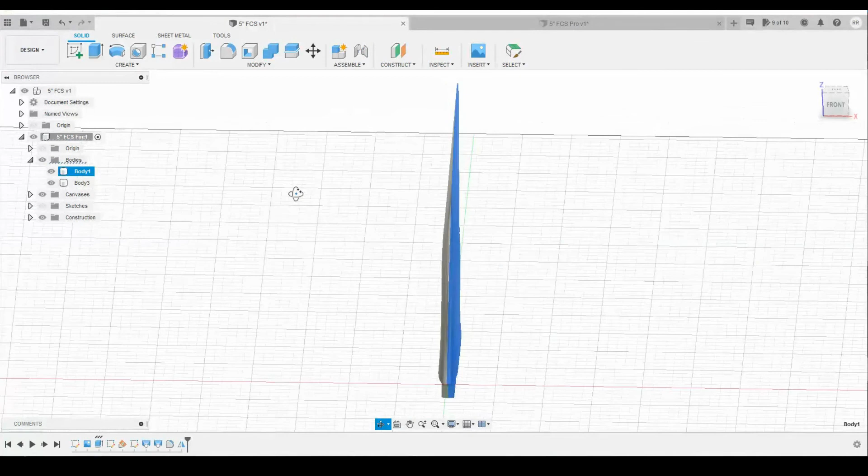What that will do is create over here two bodies. So, you know, which side's left, which side's right, depends which way up your surfboard is. Let's assume that the highlighted blue section there is left hand, so we will do 5 inch FCS left hand.

And then the other side we're going to call, surprisingly, 5 inch FCS right hand. Right, now we have two bodies. Let's turn them both into components. So we right click on them, create components from bodies. Now we have a left hand and a right hand that we can then right click on, save as STL.

What is this? This is the JH, I've clicked J instead of L. Left hand. God, right, let's try that again. Right click, save as STL. 5 inch FCS left hand.

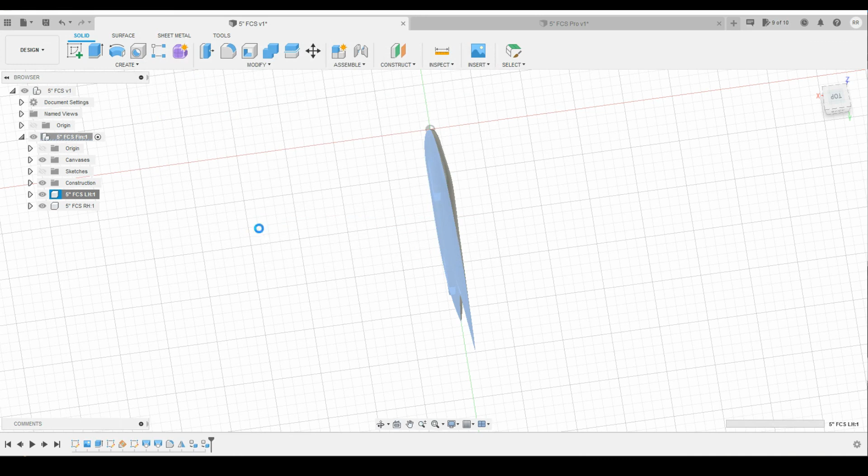We'll do the same for the right hand. Save as STL. 5 inch FCS right hand. There we go, we have saved the two halves.

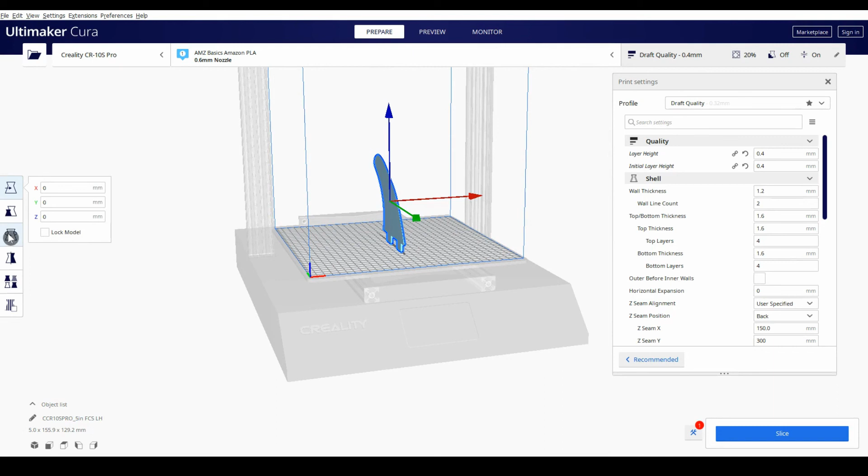Then we'll open up our slicing software, I'm using Cura. We'll open up one of the sides, so let's start with the left hand. Now it's going to put it in the same orientation that we drew it in. All you have to do for that is click on it so it's selected, click on rotate and rotate it. Now that's bendy side down, we don't want that, so flat side down. And if it wasn't sitting perfectly flat, which it is, all you've got to do is click on this lay flat and it will pull it flat, just in case you didn't know. So now we have half of our fin sitting in our slicer.

If you've never used slicing software before, your default settings will usually give you something decent, but you want to play around. Don't make this your first print. Play around with some of the calibration things online. Once you know all your settings, you slice it.

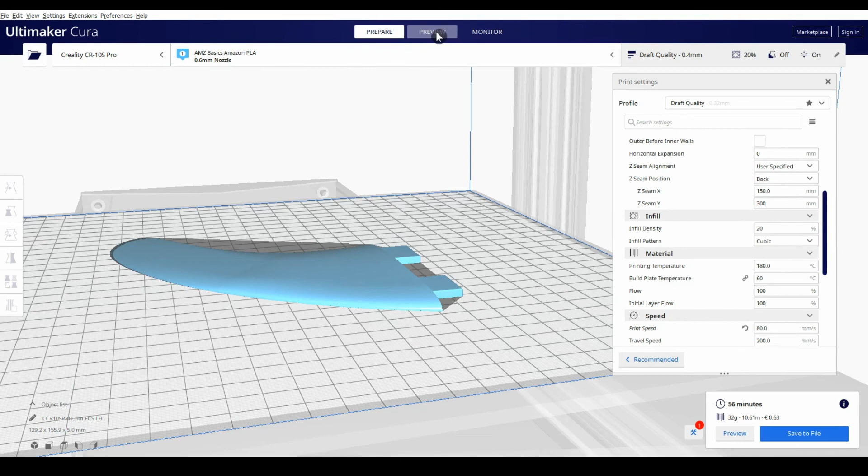It's going to take 56 minutes to print a half, and then check out all your layers. So layer 1, move up through the layers. This is a little bit of infill, but not a lot. And there we have it. You can just save that to file, print it out, and you're good to go.

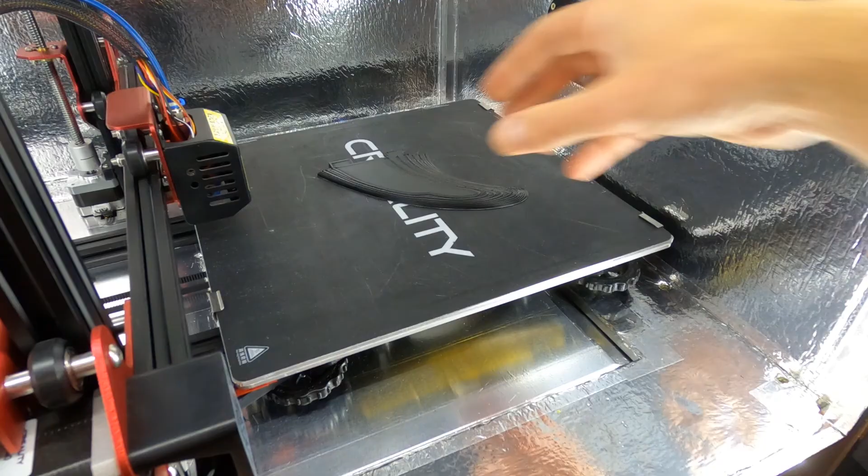I'd advise printing any fins out of something like PETG, it makes them much stronger. PLA fins wouldn't be much use as they wouldn't be very strong, and also they wouldn't survive very long in the sun. Once you have your two fin halves printed, you need to bond them together with something like a polyurethane glue, and you can even skin them in fiberglass if you so desire. Fins can make a huge difference to how surfboards handle, and now with your newly acquired skills, you can take a whole handful of cheap 3D printed fins to the water to try out.